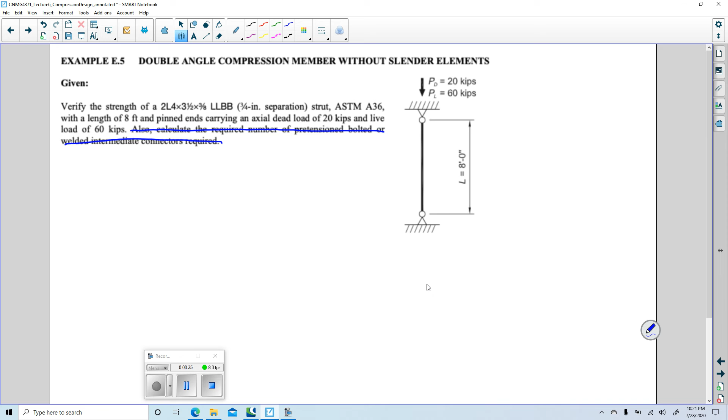First thing I want to talk about, the first thing we want to calculate, if I want to use the design tables, is the effective length, because that's what we can use in the design tables, right?

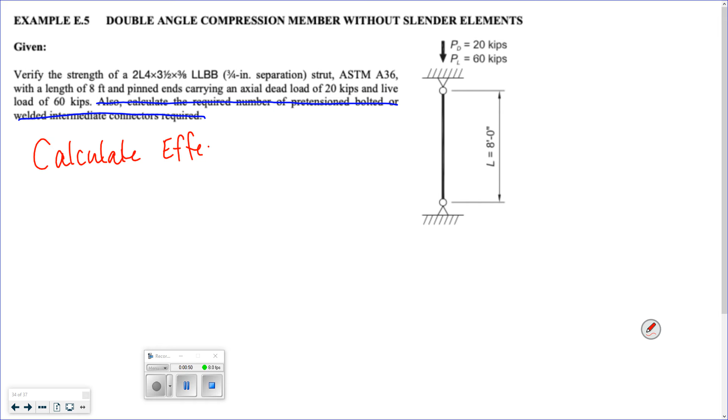Well, right now K equals 1.0 because it's pin. And my LX equals my LY equals 8 feet. It doesn't say there's any intermediate bracing. So my LCX is equal to LCY is equal to 1 times 8 feet, equal to 1.

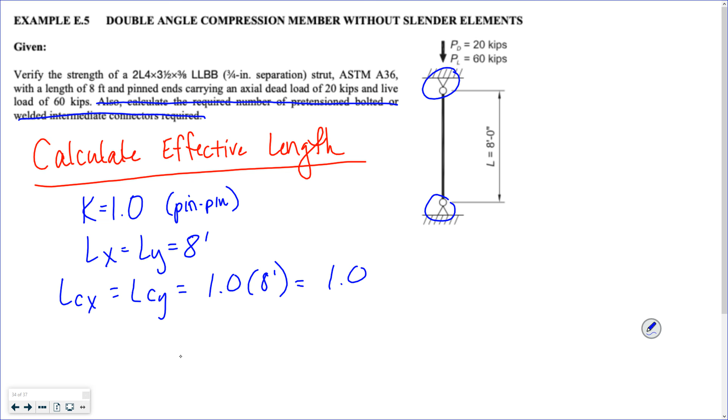Okay, so now I can enter the design tables. I am looking for 2L4 by 3.5 by 3/8, long legs back to back, with a 3/4 inch separation and ASTM A36 steel. Let's go to my design tables.

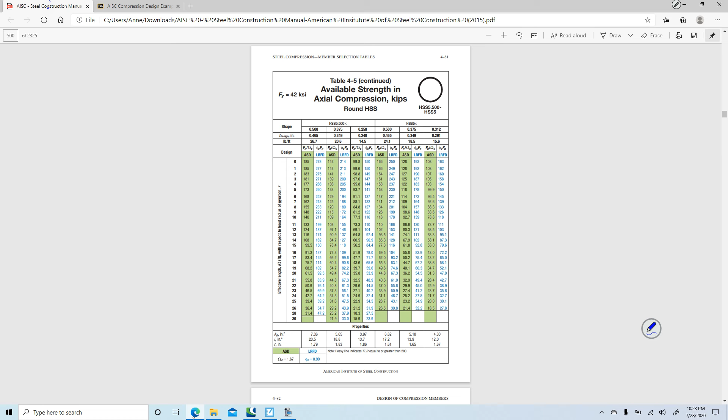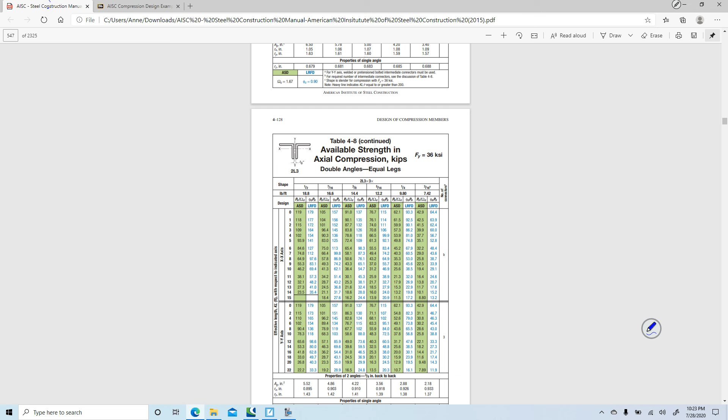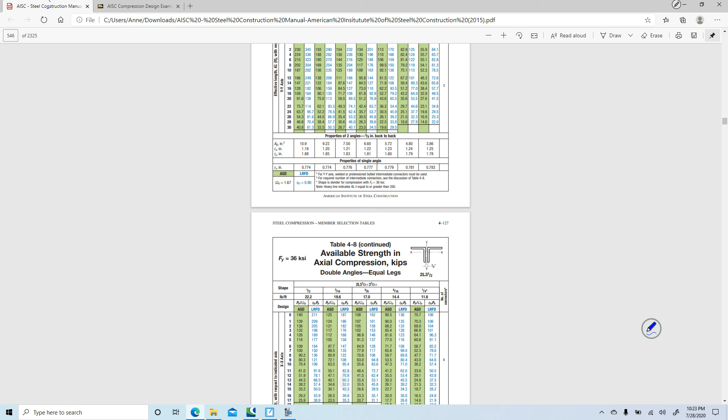So let's see, if you go to page 4 by... oh, these are equal, that's why. I was like, wait. Okay, there we go. Long legs back to back.

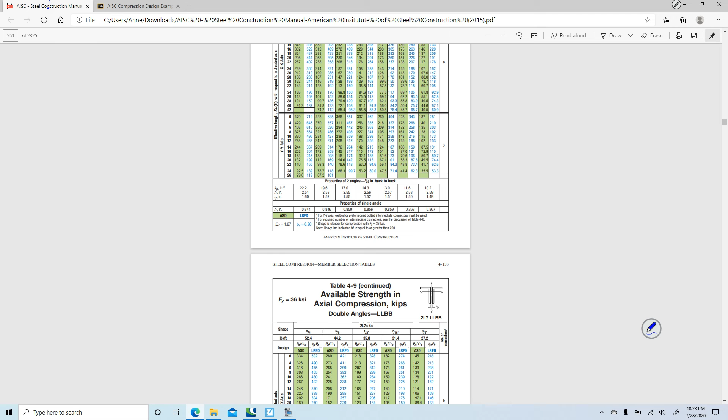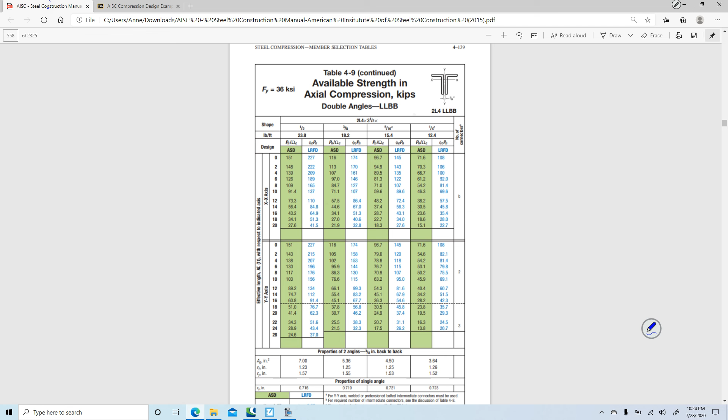So let's see, we have A36 steel, okay, 4 by 3.25 or 3.5, long legs back to back, 3/8. L4 by 3.5 by 3/8. And I want to go to 8 feet.

And look, it's effective length with respect to two different axes. This is with respect to X. Right, we have our x-axis, 8 feet, 127 kips, I'm sorry, and 8 feet for the y-axis, 130 kips.

Now, is that the same? I thought I saw it was slightly different. Right, so you should be on page 4-158. 127. It's 132 in the 15th edition, not 130.

4 by 3.5, 3/8, 132. So let's just say that, right? 132 kips in the 15th edition. It's still 127 for the x-axis.

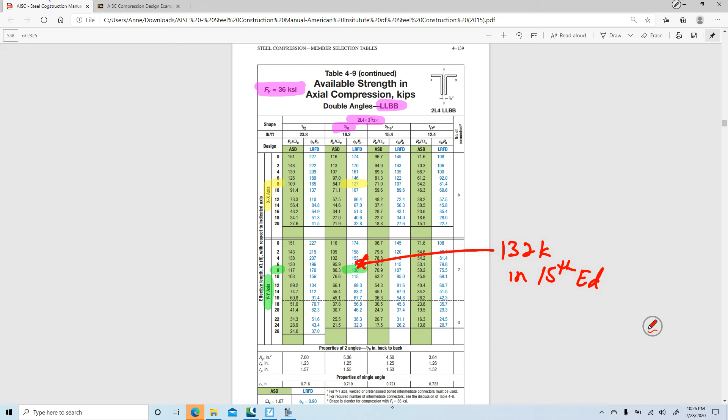I don't know if there was a typo or what, but the one thing that you'll notice is there's an assumption, right here. It says 3/8 of an inch.

If you go back to the beginning of the chapter, it'll probably tell you a little bit more. It doesn't, but what it's telling you is the property of two angles, 3/8 inch back to back, which means it assumes a separation of 3/8 of an inch, is what that means.

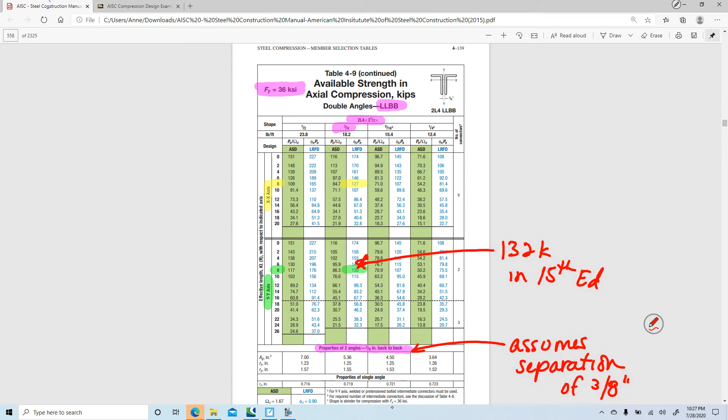Okay, well let's go back to our design. It said 3/4 inch, right? Right, I have 2L4 by 3.5 by 3/8, check, long leg back to back, check, ASTM A36, but I don't have—I have 3/4 inch separation, not 3/8.

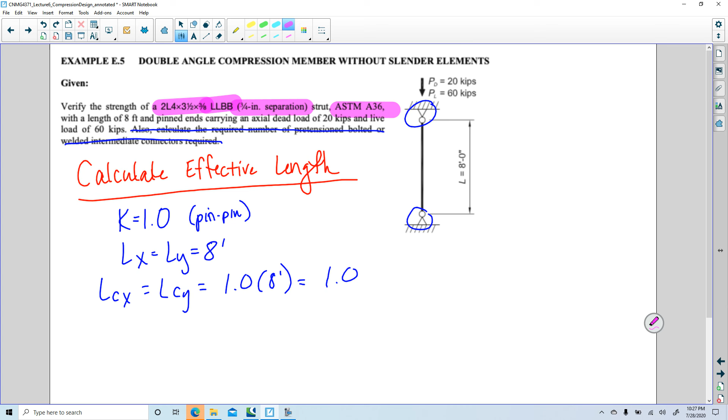So what does that mean? It means if I'm looking at my angles—these are long leg back to back, although it's not that different—but the separation between the two is 3/4 of an inch.

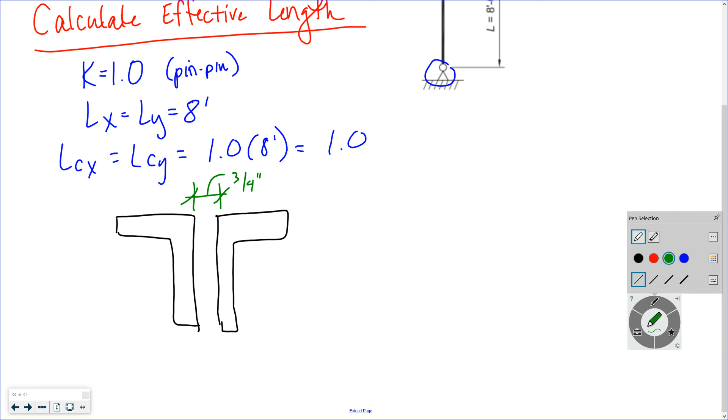But the table assumes 3/8 of an inch. So what does that separation affect? Well, if we go back and look at this little picture right here, we have an X and a Y.

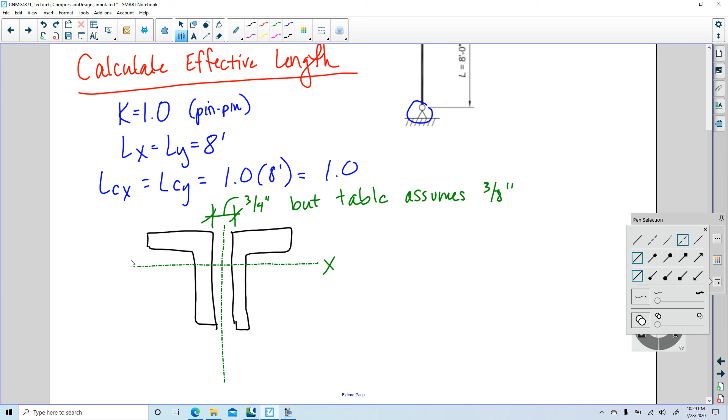Should be looking right in front of you, but we have—this is our centroid, our X-axis, and our YY axis, right? XX and YY.

If I make my angles further apart than they are assumed, will it affect the XX or the YY properties? Increasing separation affects my YY properties.

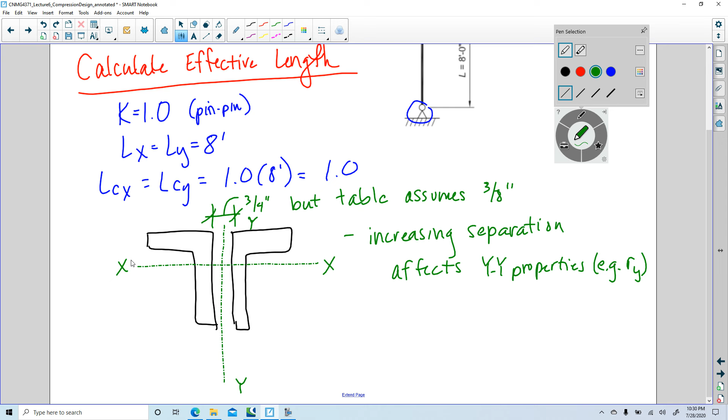For example, my RY. So that means that if I go to my design table, this is probably fine—this 127 is probably fine, because my x-axis doesn't depend on that. But my y-axis, this might change.

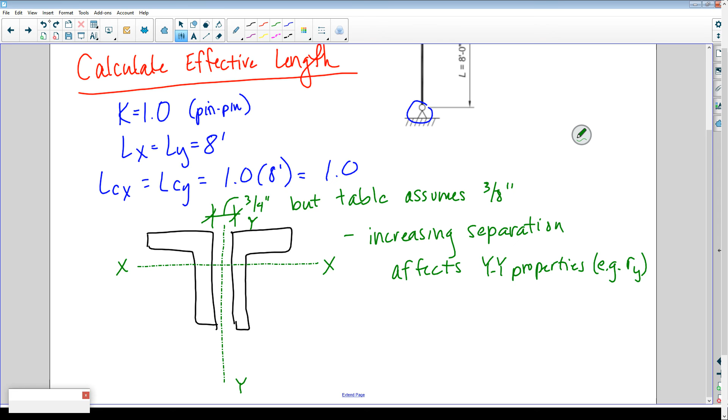So this is similar to an effective length when we have strong versus weak axis bending in the W shapes, right? When we have to calculate different effective lengths.

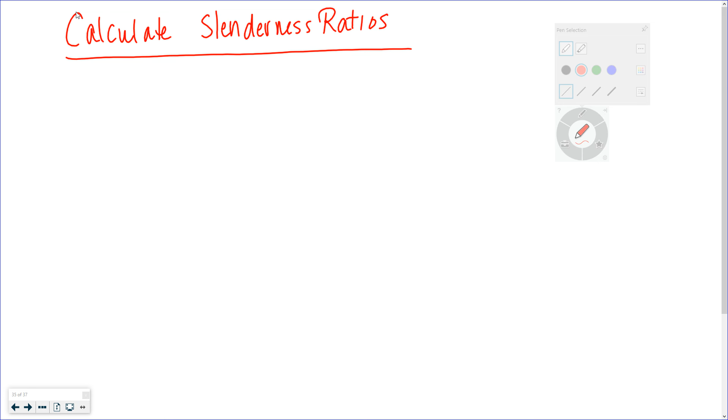So what I'm going to do is calculate slenderness ratios for my X and Y and see which one actually controls, right? So I need to know my RX and my RY for the two different setups.

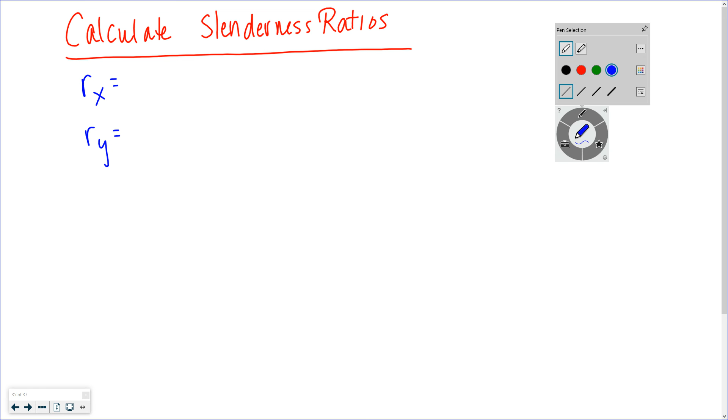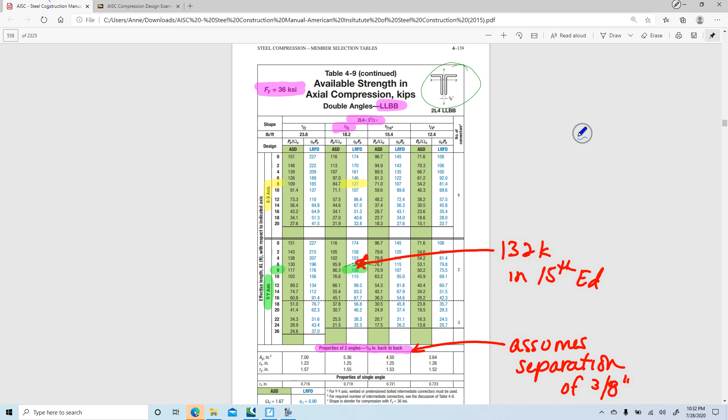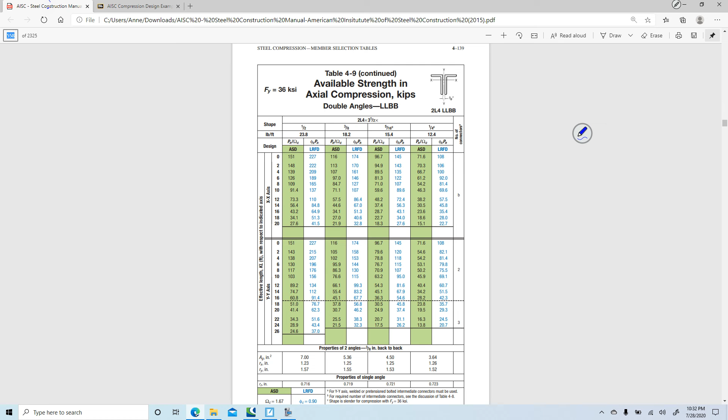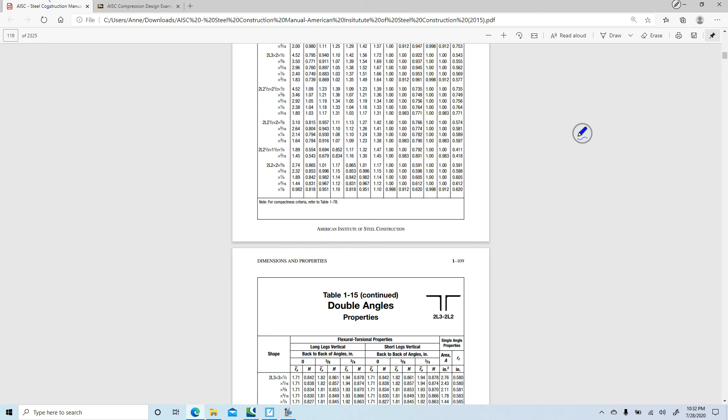So I'm going to go to my dimension tables. Okay, double angles—those are short legs back to back, that's long legs back to back. This might look a little bit different. I'm on page... yeah, it's broken up. No, it's not, it looks the same. Might look a little bit different, but okay.

You're on page 1-114. So here I have 2, 4x3.5, 3/8, and my radius of gyration—I have 3/4 inch separation, long leg back to back. My radius of gyration for that separation is 1.69, so my RY is 1.69 inches.

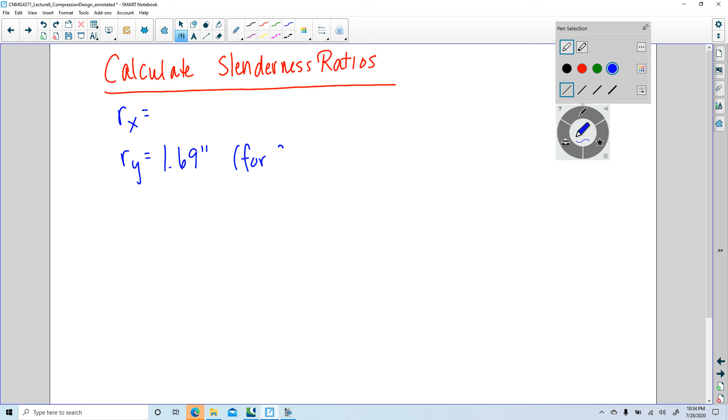That's for my 3/4 inch separation. My RX is 1.05—nope, that's short legs back to back. Is one—see, long legs back to back. My RX—alright, there's RX, 1.25 inches.

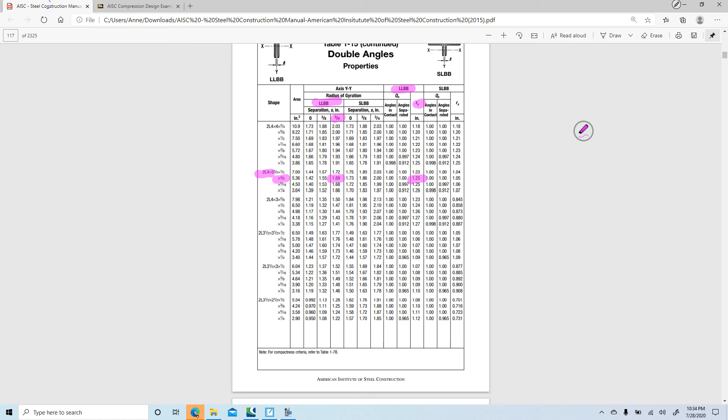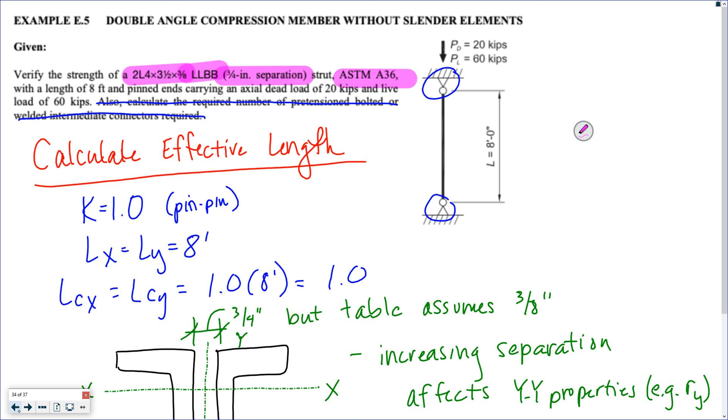So you see the RX doesn't depend on the separation, which makes sense, right? The further thing—if a dimension changes in the Y direction, this increased the dimension like this way, right? So the change would be in the Y direction, not the X direction.

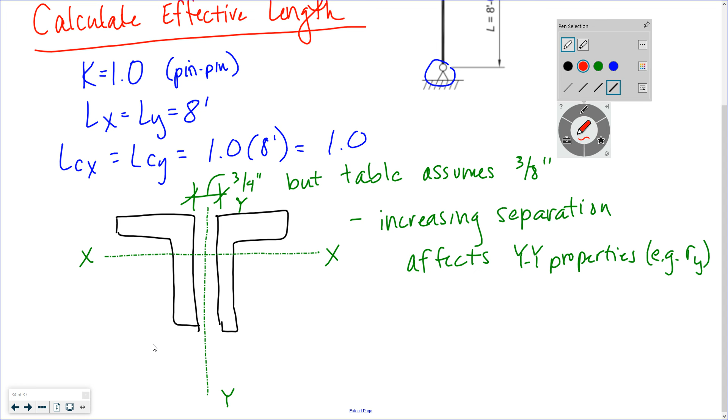So let's see, my RX was 1.25 inches. So let's see, KL over R for my X is 1 times 8 feet divided by 1.25 inches. KL over R Y, 1 times 8 feet divided by 1.69 inches.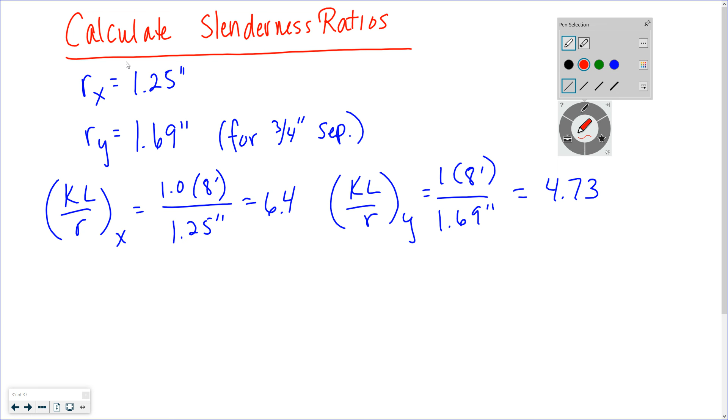So this actually is going to help us out, right? So 8 divided by 1.25 is 6.4, 8 divided by 1.69 is 4.73. So in this case, that slenderness ratio controls.

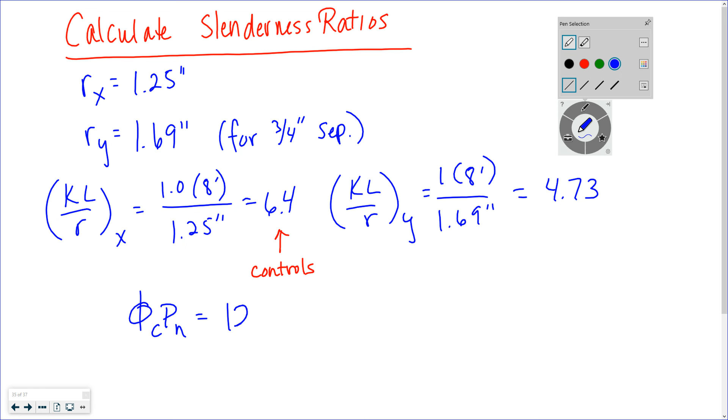Therefore, I can use 127 kips, right?

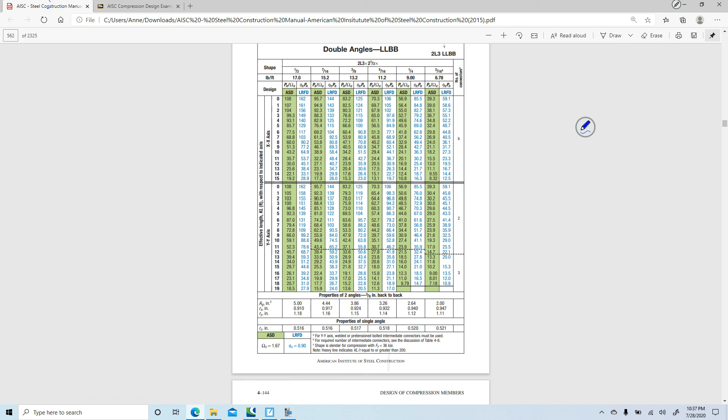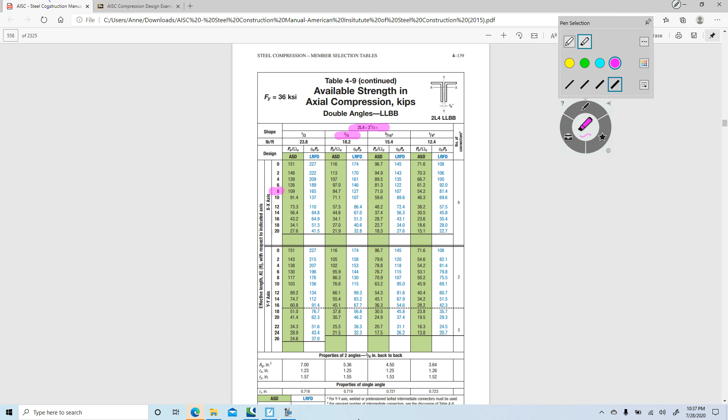My 2L4 by 3.5 by 3/8, 8 feet, is 127 kips. Because my slenderness in the X direction was larger, I can use that value.

So that is on page 4-139, table 4, table 4-9, LCX equals 8 feet.

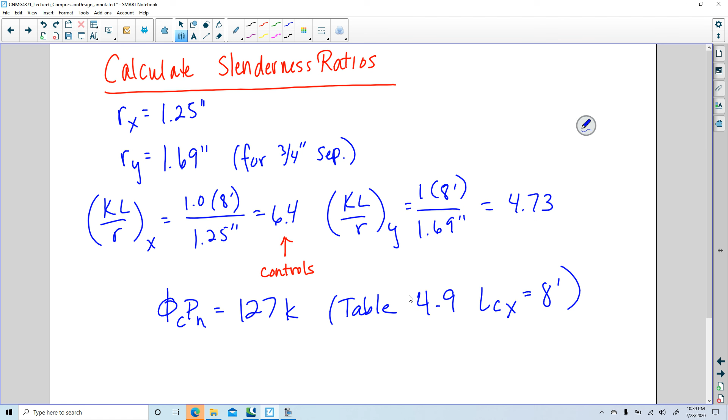If my Y had controlled, then I would have had to have done an equivalent length to correct that, and you might see that in the design example. But actually, by doing this, well, I'll show you what they do in the design example.

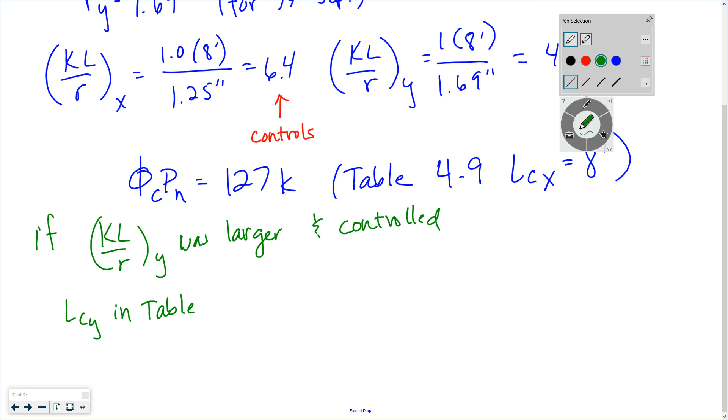If KL over RY was larger and controlled, now remember, LCY in table 4-9 assumes a separation of 3/8 of an inch.

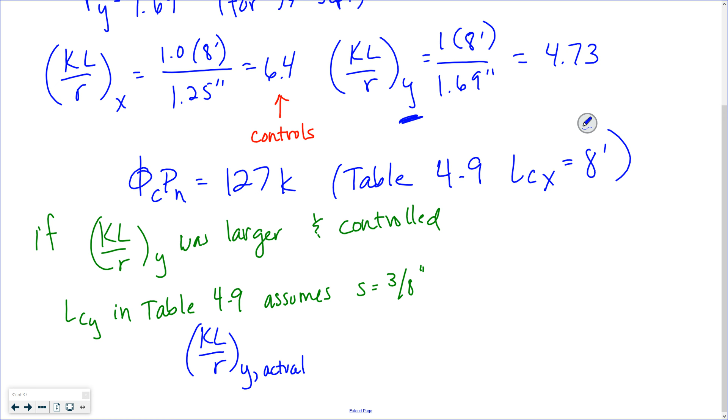So we're going to have to do an LCY equivalent and make the slenderness ratio, right? If you would do KL over RY actual, that would be kind of like this, to some KL over RY equivalent.

And then you basically solve for LY actual over RY actual, equals LY equivalent over RY equivalent.

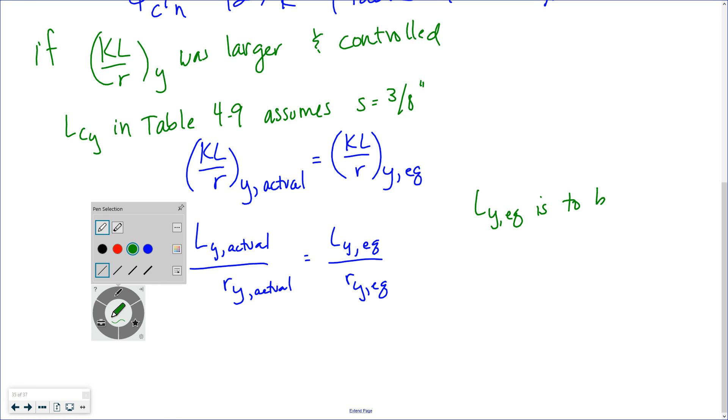LY equivalent is to be used in table 4-9, where RY equivalent is assumed to be RY for a separation of 3/8 of an inch. We have an actual separation of 3/4 of an inch.

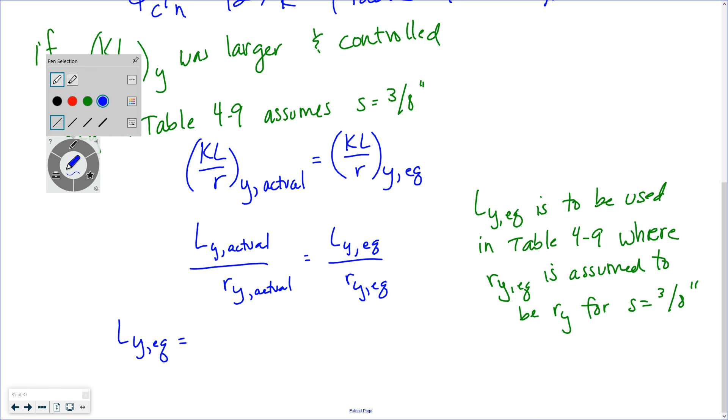So we want to solve for that equivalent, RY equivalent over RY actual. This is similar to what we do when converting from weak axis, finding that equivalent length if we actually have strong axis bending in a W section. We want to find an equivalent length that would give us the same slenderness ratio. We want to have the same slenderness ratio.

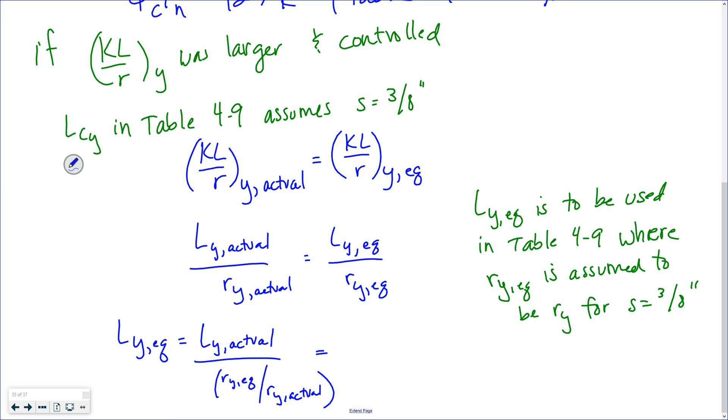So we need to calculate a length that would have the same slenderness ratio, but with a different RY. Same thing for weak versus strong axis bending. You want to find an equivalent slenderness ratio that assumes RY versus a slenderness ratio with RX. So this is the same in here.

We can substitute, let me write in a different color. Similar to LY equivalent equals LX divided by RY over RX. Or RX over RY. And this, equivalent, is equal to RY actual over RY equivalent.

Replace actual with X and equivalent with Y. I took the wrong things to the wrong side, I hope I didn't. I took this, oopsies. I just divided this by RY equivalent so that this goes away.

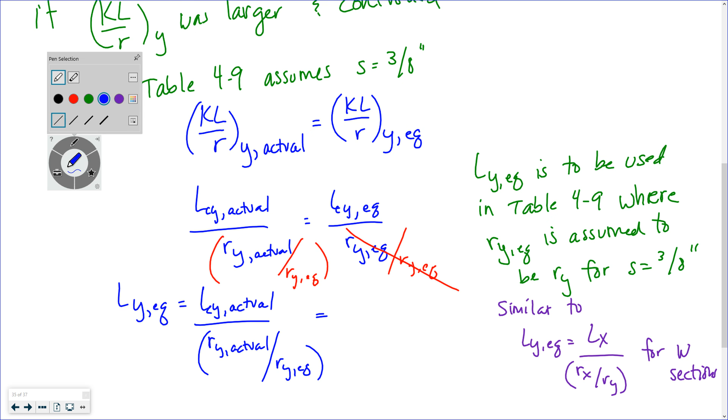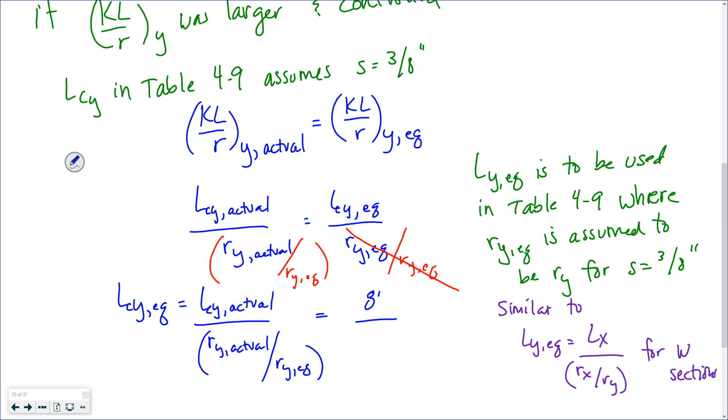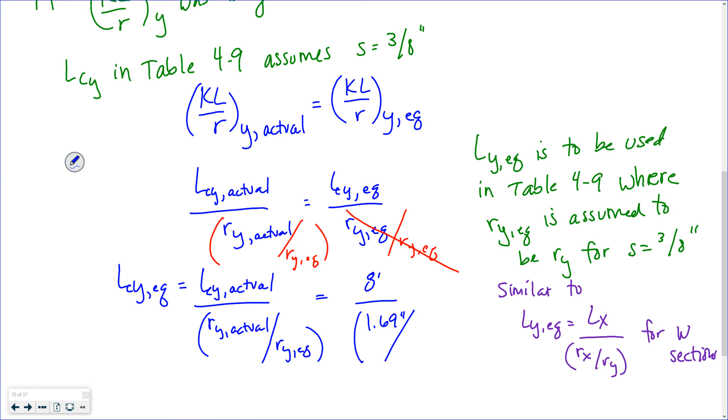LY actual, or LCY, LCY equivalent is LCY actual, which is 8 feet, divided by our actual RY, which is our RY for 3/4 of an inch, 1.69 inches, and our RY equivalent, which you can look up for 3/8 of an inch, 1.55 inches instead of the 1.69. See, the 1.25 is the same, 1.55 is different.

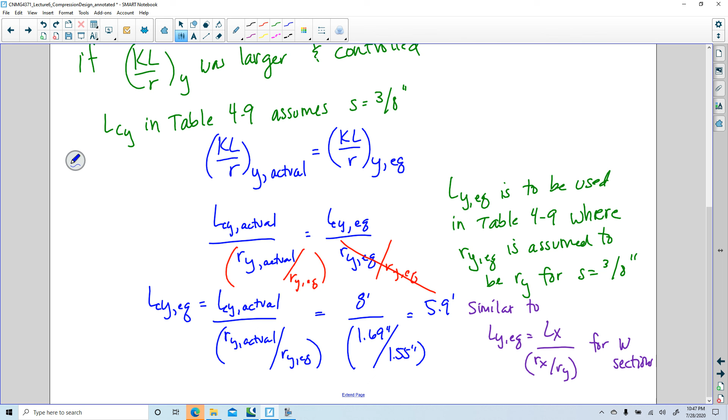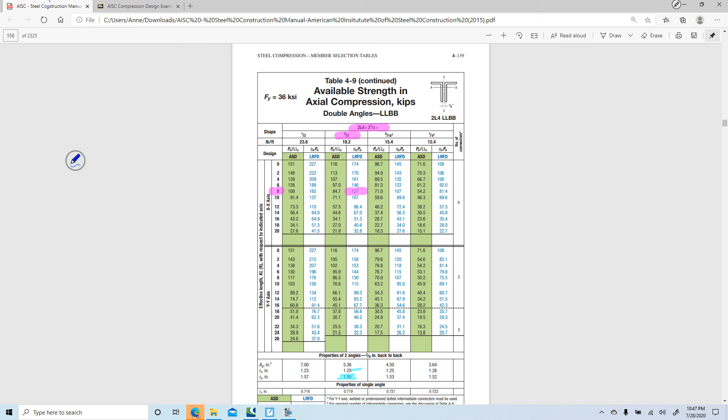So that would give you an equivalent length to use in the table of about 5.9 feet, so about 6 feet. Now, I don't know about you, but if something gets shorter, it's probably getting stronger, because buckling is all about how long and slender something is. So if we just assume it's shorter, it's probably going to gain strength, right? So let's see, about 6 feet for the Y.

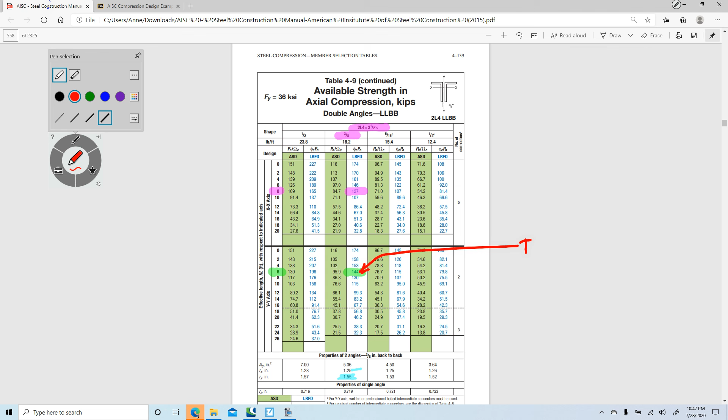Now we've assumed a Y equivalent, we're still looking in the Y, not back up in X. But 6 feet is 144 kips. This is for our LY equivalent of about 6 feet. So still 127 for X.

What that means is this is going to buckle about the XX axis before it buckles about the YY axis. It was going to do it even if the separation was 3/8, because 127 versus 130. Increasing that separation increased the radius of gyration, which decreased the slenderness in the YY direction.

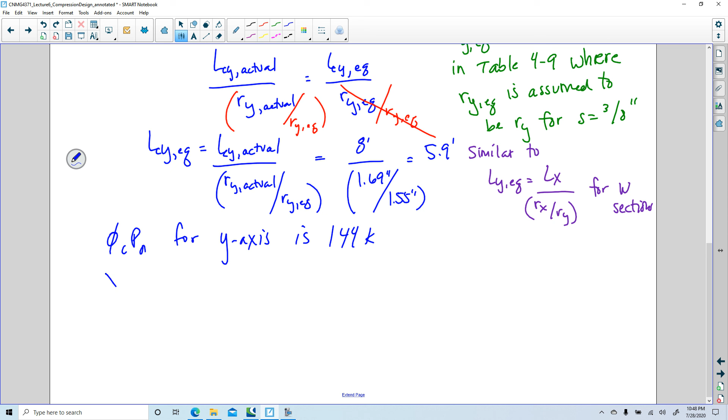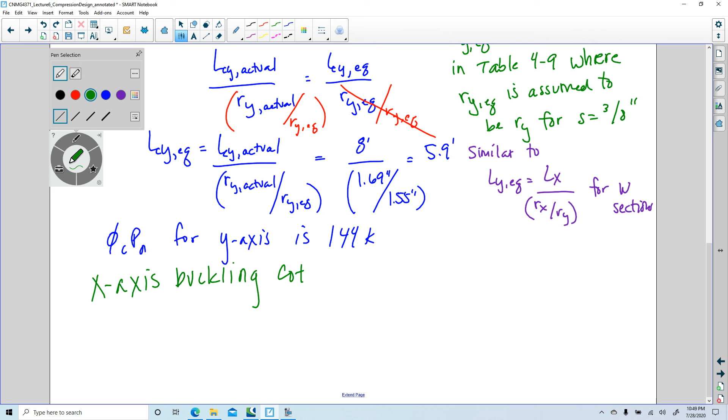And it's about 144 kips. So x-axis buckling controls, phi c Pn equals 127 kips, because it's going to buckle in the x-axis at 127 kips before it can even get to that 144.

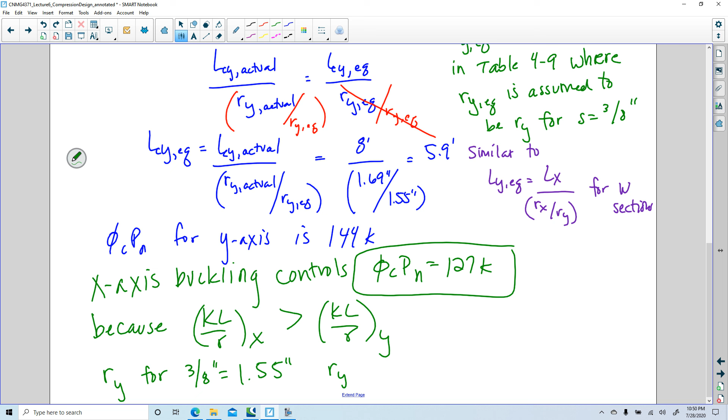This is because KL over RX is greater than KL over RY. RY for 3/8 of an inch was 1.55 inches. RY for 3/4 of an inch separation, you increase the separation, you increase that RY. Therefore, KL over RY decreased.

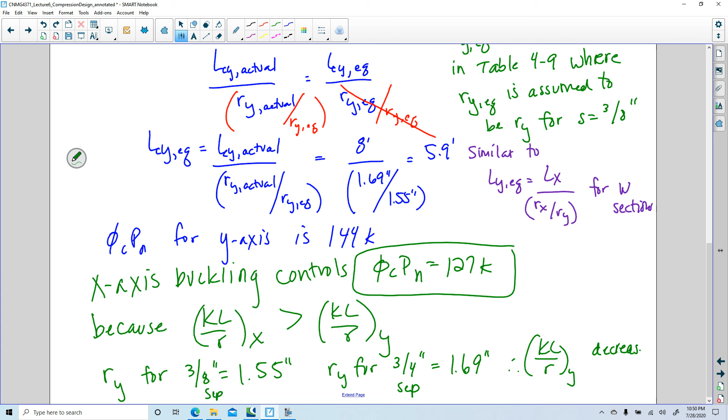Therefore, KL over RY decreased with your increasing separation, making 2L4 by 3.5 by 3/8 even more likely to buckle in the X direction first, having X-axis controlling, if that makes sense.

I'm just kind of writing it down. Because if you look at it again, 127 kips for 8 feet in the x direction, 130 kips in the y direction. Already your x-axis is controlling. Increasing that separation only increased the radius of gyration, which decreased the slenderness ratio, making it even more likely. It went from 130 to 144. Now it's not even close, it's going to buckle in the x-axis, what is that, 17 kips earlier.

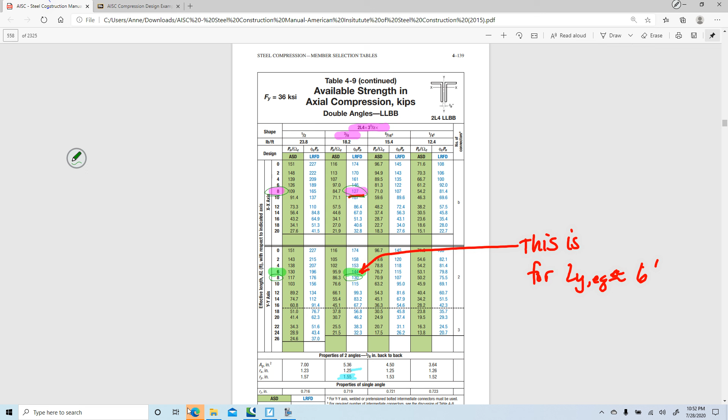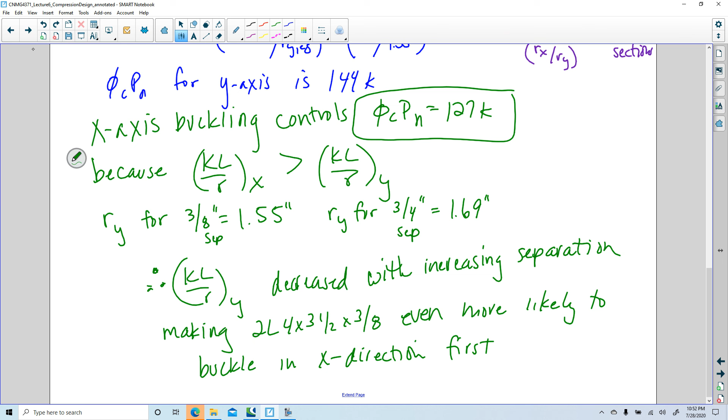So I hope that kind of made sense. You can look at that in the examples if you'd like. Oops, I forgot to...